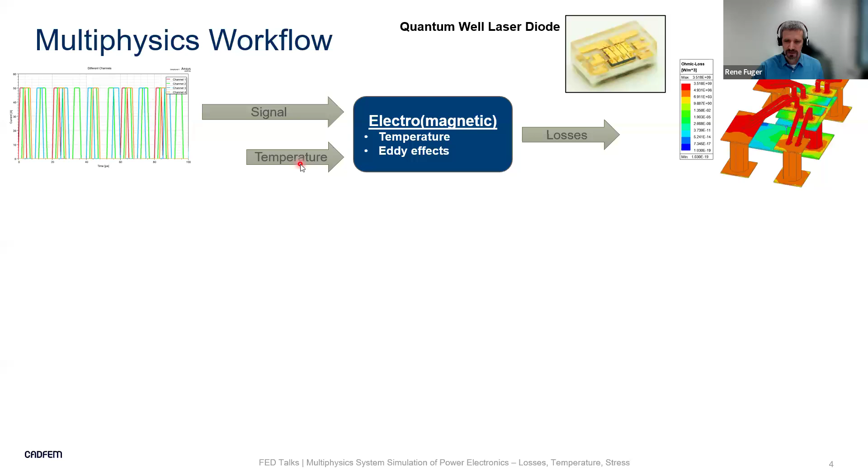You see here something, an arrow which says temperature. For sure, if this system is working at room temperature, there will be different losses than when it works at 100 degrees Celsius, because the conductivity and magnetic properties and so on depend on temperature. So that means we need a multiphysics workflow, especially electromagnetic. That's something which is really close. There's a huge influence of temperature. And so that's why I need also some simulations or some knowledge about the thermal behavior.

The thermal behavior depends mainly on the loss distribution. So we have already seen the losses are not everywhere the same. They are locally distributed. And on the boundaries, meaning is it cooled by airflow? Is it in a fixed box and there's no airflow? Are there some other components around with high temperatures and so on? So that mainly influences the thermal simulation.

So one of my inputs, as I said already, are the losses. But there can be also other thermal loads. For example, I removed the semiconductor part, the laser part, which you see as the green parts in here, because that's not really the electrical part where current flow makes the losses. There are other loss distributions. These thermal loads, these losses in the semiconductor part, in the laser part, can be an input from data sheets or can be simulated in another way, can be measured, whatever.

So I have one part is the losses, one are thermal loads, could be also outside loads, and my thermal boundary conditions. So that can be, again, a function over time. I haven't mentioned this. On this axis, we have seen the time. On this, we have seen the current. Here we see the power over time. So it's a transient behavior. As I said at the beginning, we want to know how it behaves over a certain time, when I apply the currents for a certain range over a time.

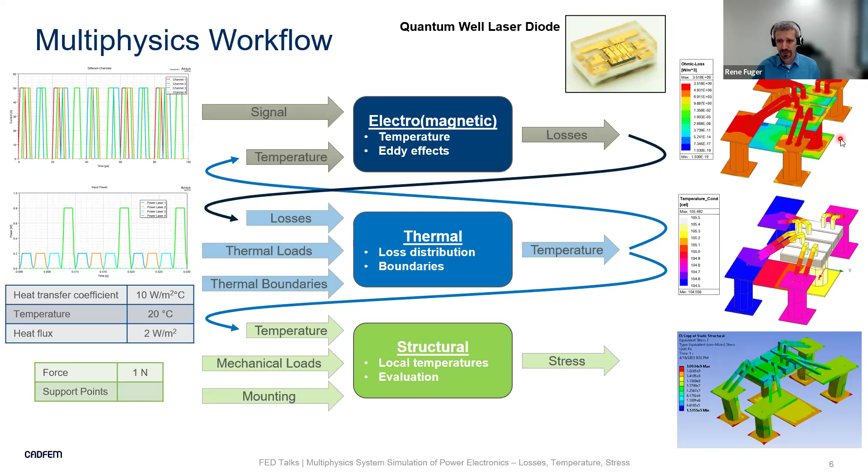Maybe as an information for what we're looking at today: on the left side, I have single values as an input, constant values, or I have a function over time. On the right side, you see I have distributions. The temperature, the losses, the stress, they are localized. They are connected to a position, X, Y, Z position on my system. So those are distributed values. So that's the general workflow of multiphysics simulations.

What is now the challenge? The challenge here is, I want to know how my component, could be this laser diode, could be a half bridge system, could be power electronics, could be a PCB which includes the controller, for example, doesn't matter, I want to know how this works in an operating condition.

I don't want to know what's the worst case. Yeah, that's also sometimes interesting. Or what's the standard, the steady state case. I'm more interested in how this behaves in my system, how this behaves in my working conditions. So that's the challenge which we want to look at today for the multiphysics system simulations. And I've put up here 3 questions. I didn't put the question marks behind, but those are 3 topics which I want to go into today.

First, different timescales. We'll see there are different timescales on how the physics react to changes. Then we have in the electromagnetics the issue that a lot of properties also depend on frequency. Or not only on the frequency, more on how fast the current is changing. If the current changes very fast, I get higher inductions. The induction behavior is different and so on. So I've also looked into this one.

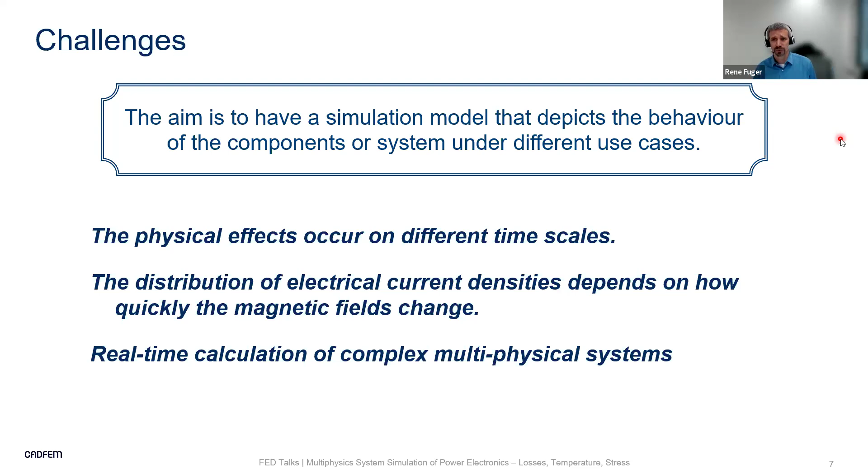Okay, so let's start with timescales. What I mean with timescales: for the electric conductivity or electromagnetic behaviors, we easily have some kilohertz, 10 kilohertz up to megahertz in the system of switching times. It doesn't have to be a sine. It can also be a signal which is switching very fast. We have a very high frequency in the system.

To really capture this in simulations, you have to make very small time steps to capture these changes. Could be a sine, could be a change from 0 to 1, whatever. If I want to capture this correctly, I have to make very small time steps in the simulation because I have to get the point where the change is.

On the other side, in a thermal simulation for the same system, in the range of microseconds, which corresponds to some kilohertz frequency, nothing happens in the temperature. There's a high thermal capacitance, there's thermal conductivity. The whole system is a little bit slower and it depends more on the energy which you have to put in. And if you make it change very fast, the energy which you put in is not this much. That's a different relation.

So to see a warm-up in the system, some relevant change of temperatures, you're more in the range of 100 milliseconds, seconds, maybe minutes, maybe hours, depending on your system.

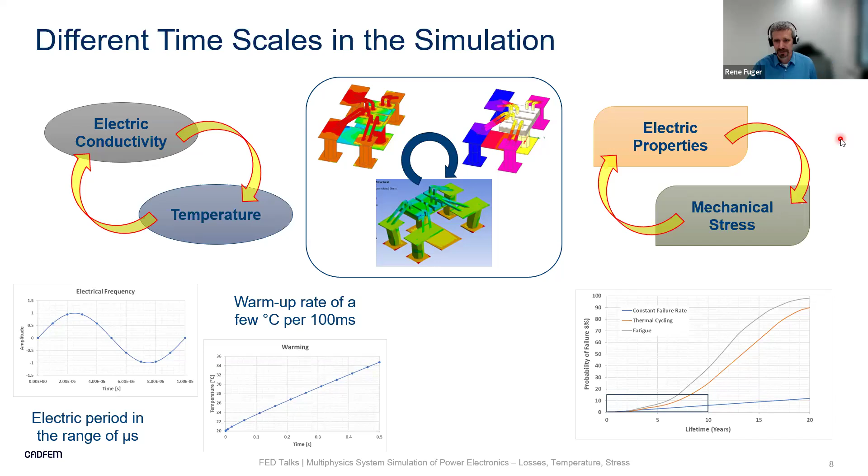And then we are here in years. So on the left side, microseconds. On the right side, we're talking about years. So I can't use a simulation at the same time to see what's happening if I use it for 10 years. So that's one of the challenges.

When we talk about simulation approaches, you might often hear something called field coupling, terminal coupling, system simulations. Field coupling, that's what you see on the left side, is something where we have 3D geometries, where I get these nice colored plots, where I get local distribution of the system, normally very high accuracy, but that takes time to simulate. On the right side, you have terminals, so you have some input, some output, and a function between which connects the input signal to what should come out.

Simulates very fast, microseconds, whatever, but I don't get the localized results. I know only if I put this input, I get the maximum temperature of the system out, for example, the mean temperature, the temperature on one point, which I might be interested in.

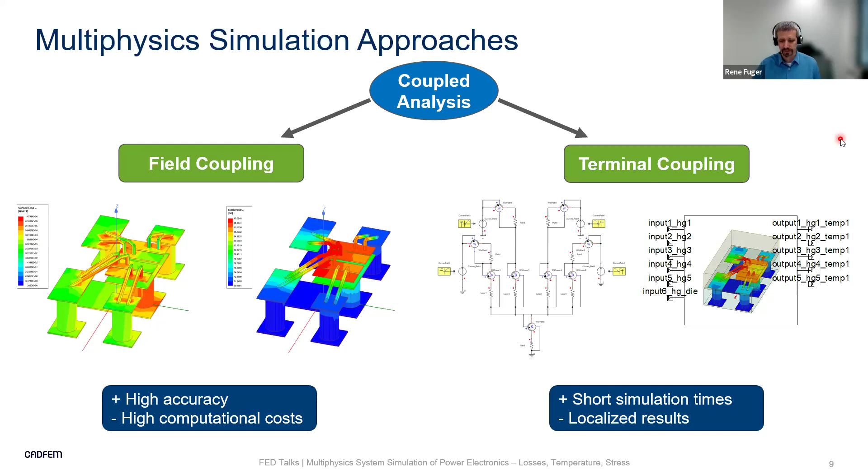Maybe I should explain this a little bit more if you're not familiar with the whole simulation range. So if I talk about field simulation, I'm talking about a system where I discretize my problem. So a typical code, I create a mesh, that could be using finite element methods, can be the FDTD method, the finite-difference time-domain method. There are a lot of different methods there.

I normally have the physics described by partial differential equations. An example for electromagnetics would be the Maxwell equations, which I want to solve. I can't solve these equations analytically on complex geometries. On very simple geometries, on a straight line, whatever, I can do this, but not for complex geometries. So that's why I have to discretize the problem and solve the relevant equations in each of these elements by some approximations and numerical methods.

But you can imagine if you have such a mesh, for each element you have to do this. That needs high computation power. So the good thing is I get high-resolution local fields. I understand the system. I need heavy computation, meaning power and time. And I can use this normally for design validation, where I'm really interested in what's happening there and there, what's happening if I do some changes.

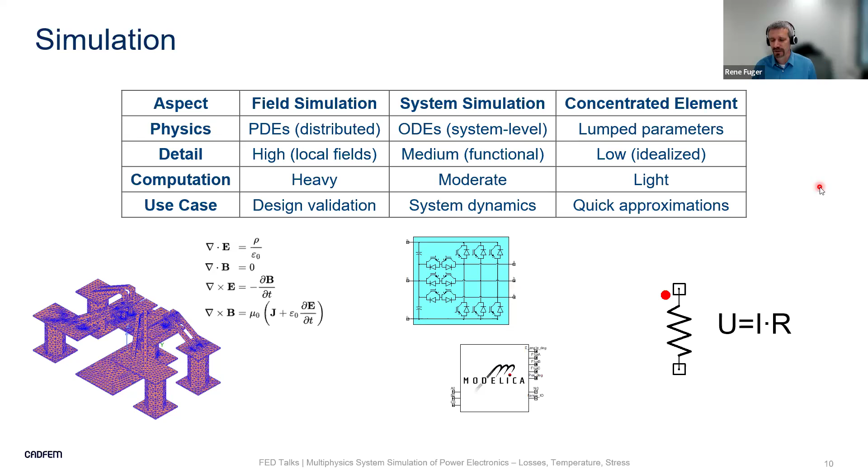Another thing is this one is not connecting to the inductor which is next to it. There's no information on where it is positioned. If you try to make the circuit, you can connect the resistance with an inductor, but they don't know how close they are to each other. If I have two inductors, that's a problem because they can interact over the electric and magnetic fields. If I make only concentrated elements, they don't know where they are.

And now about the coupling. So we want to couple different physics. We want to make coupled analyses. So that means we can do field simulations, which you see here on the left side. The strength is you have the high accuracy. You really have the geometry. You can see what's locally happening.

You can couple the electric degree of freedom with the thermal degree of freedom. So you can go into the detail. You can describe your physics very accurately. And you can get a lot of information, even nonlinear materials and so on. The con is if I do this one, it takes time.

First, I need the time to prepare this one. I have to set up the simulations, then the simulation runs, and then I have to make the post-processing to get my plots and to get the information out of this one. The other point, which is important, I need already a geometry. I have to know the materials. Without this knowledge, I can't do any field simulations.

On the side of system simulations, in regard to multiphysics, it's a simplified problem. I can include interactions between thermal and electromagnetic, for example, or thermal and stress, by connecting the average temperature, the temperature at some point, and I know my system, and then I can calculate the temperatures around it, and so on. It's good for dynamic simulation. It's much faster than the full field simulations.

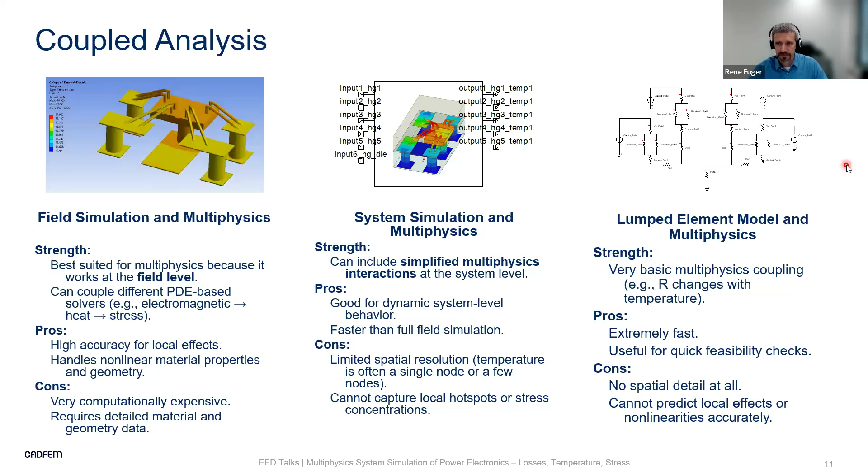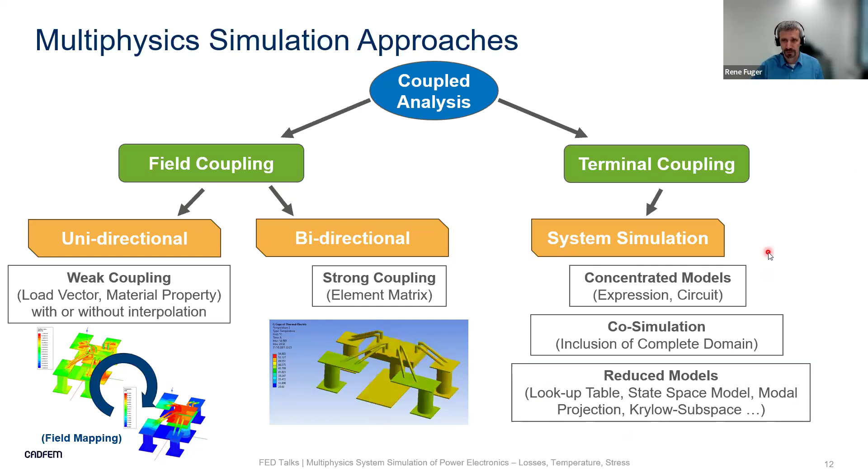So again, coupled analyses: I have field coupling. Unidirectional or bidirectional means I can take the thermal and electromagnetic simulations step by step, or I have to solve them at the same time. That depends on how fast these two react. And I have the system simulations or terminal coupling on the right side. I want now to focus on this here on the right side, system simulations. That's also the topic of this presentation.

So we want to do coupled analyses or multiphysics simulations. We want to use terminal coupling, and we want to use system simulation because we want to describe how a system behaves over a long time or over the operation time.

So the system simulation, I can set it up with concentrated models. As you have seen before, I can use a resistor, I can use an inductor, I can use the same in the thermal part. I can use the thermal conductivity, similar to electrical resistivity, to make a lumped element model of my thermal behavior. I can do the same for a fluid system where I have gas flowing through. So I can describe this by concentrated models.

It's generally based on mathematical models, physical equations. As we have seen before, Ohm's law I can use for this one, for example, and so on. Or also more complex equations: I could use the temperature-dependent conductivity together with the size of the resistor, and then I can get the voltage dependent also on the temperature and the current which I have, for example.

I can use libraries. There are standard libraries. There are a lot of system libraries available, free, open source, but also some which you have to pay for. It is easy to exchange between tools, between companies, between departments, and it calculates very fast, but has in general a lower accuracy because a standard resistor doesn't describe my specific resistor. So that's what I have to think about.

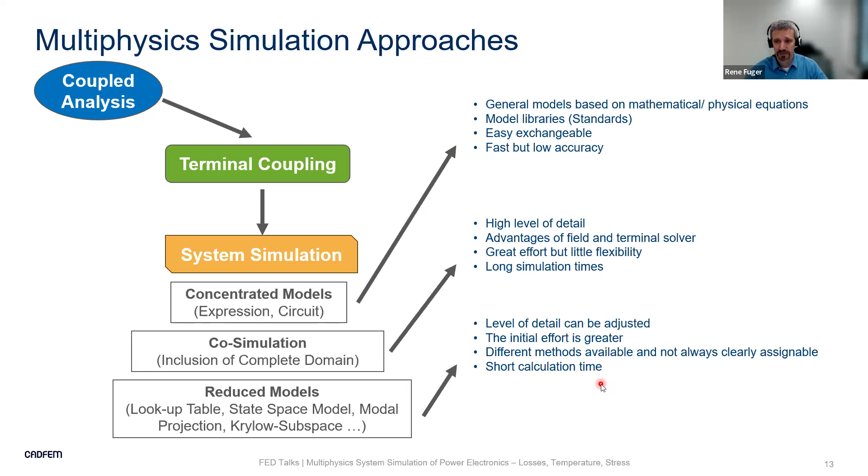So what I mean with reduced order model or surrogate model: as I said, there are a lot of different methods how you can do it. It's mainly based on mathematical methods or on machine learning systems. So you simulate different cases, case A, B, C, D, and you see what you have put in and what's the outcome, and you try to make a connection between these two by mathematical equations, by data tables, by reducing the number of degrees of freedom, like modes which you're using. And then you have this reduced order model.

But if I say, okay, I don't change the geometry anymore, I only want to vary the input parameters. I want to run with higher currents, I want to run it longer, I want to make higher switching times. Then it's useful to have this reduced order model, surrogate model, which costs me some time at the beginning to create. But when it's created, my simulations run faster.

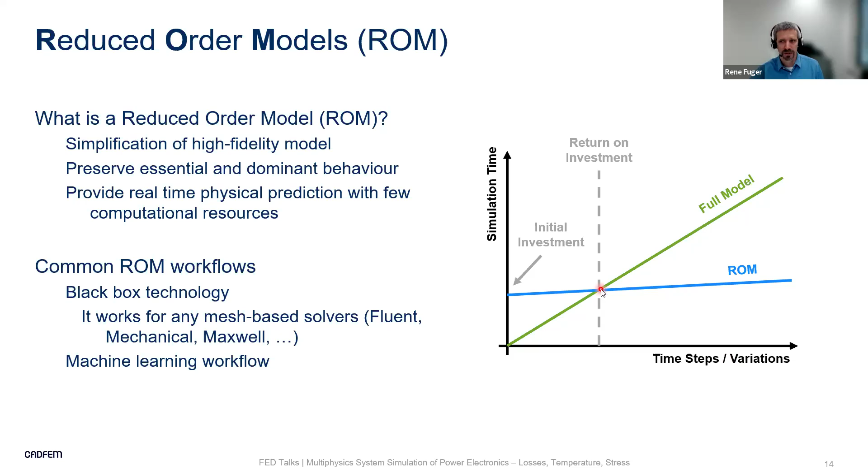That should be shown here on this graph. So if I have a lot of time steps, or I want to run several variations of input parameters, at some point the reduced order model, the system simulation, is faster than running the full model. Yeah? But at the beginning, I have to invest some time.

When we're talking about reduced order models, we have to think about classification. I think that's currently the biggest challenge in creating reduced order models: I first have to know what I'm describing. I can't use all the methods on the same problem. I have to understand the problem. Is my problem a linear problem? Can the material properties be seen as linear? Can the connections be seen as linear? Or is it nonlinear? If the thermal conductivity changes with temperature, it's highly nonlinear. Then I'm here on this part.

If I'm linear, I'm this part. The next question is, can I see my problem as a static problem or as a transient problem? Static means if I put a certain input, power, I have the cooling, and then I get the temperature out. It doesn't depend on what's happening before. But if this behavior depends on before, if it was cooler, was it hotter before, and then I apply the power and so on, then I have a transient problem.

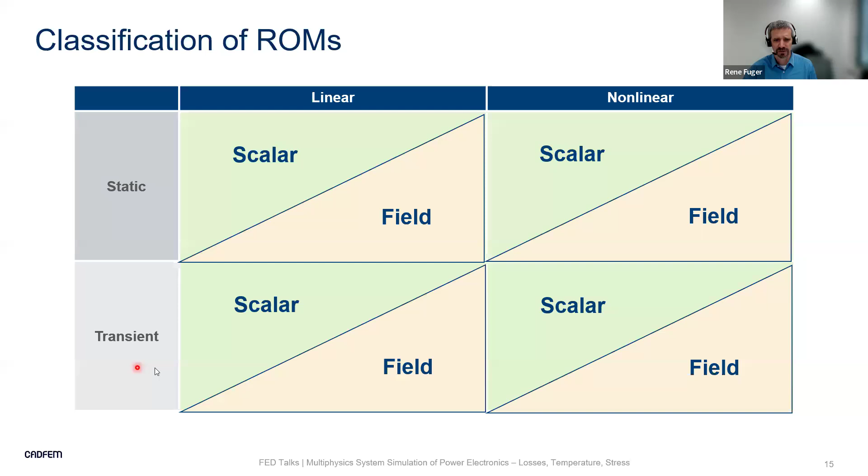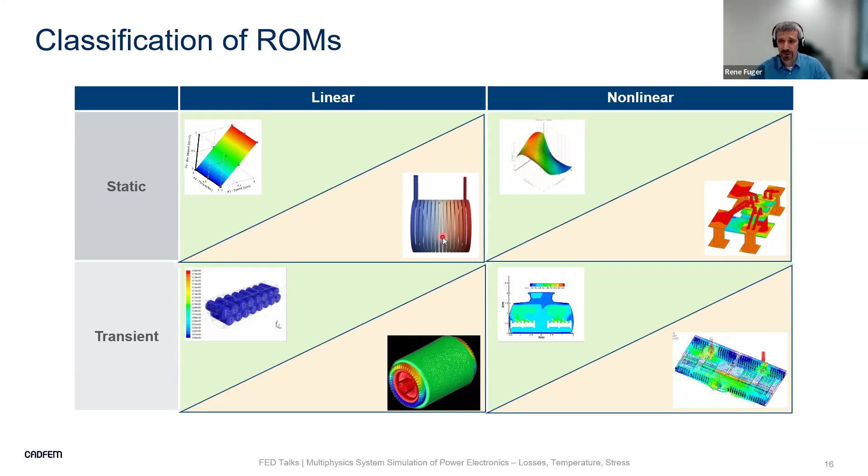And then you get this kind of complex matrix where you have scalar values, field values, linear, nonlinear, static, transient. Scalar values could be a function, could be a table, whatever. Field results are always something which is connected to the geometry, to the location, and you can put it in each of these fields, and then you have different techniques.

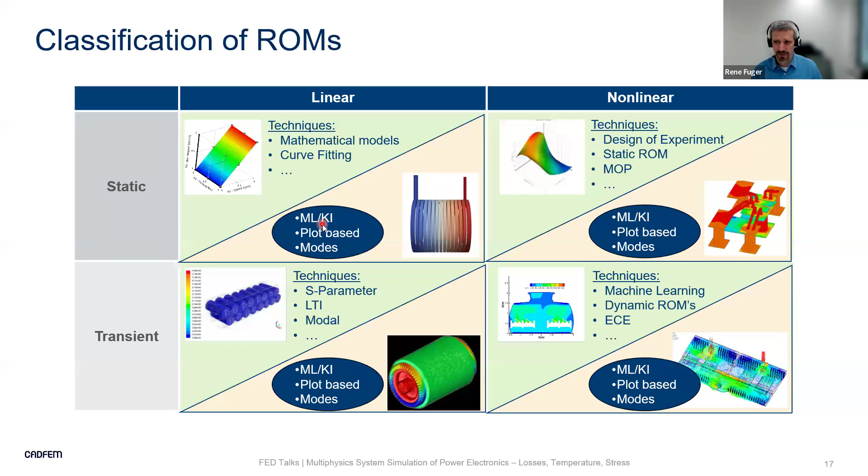So, complex matrix. I want to show you an example with the laser diode, which we have seen already at the beginning on the multiphysics workflow. As I said, that was a project which we did together to see how we can handle this, which reduced order model is suitable for the problem. Maybe there are several reduced order methods which can be applied, and we compared them.

So the challenge was the time resolution, because we didn't want to know what happens at a constant current. We wanted to know what's happening over time for different input parameters. Temperature is changing, current is changing, the environment parameters are changing. So we wanted to do a system simulation. And we want to know, does it have an influence on the lifetime of the system?

Well, the question was, the system is built for 50 amps maximum peak for this time. Can I run it with 60 amps? Is it broken in one day, or is the lifetime only reduced by 10% or something? So that was the idea, and also to create a digital twin model out of this to run these different scenarios.

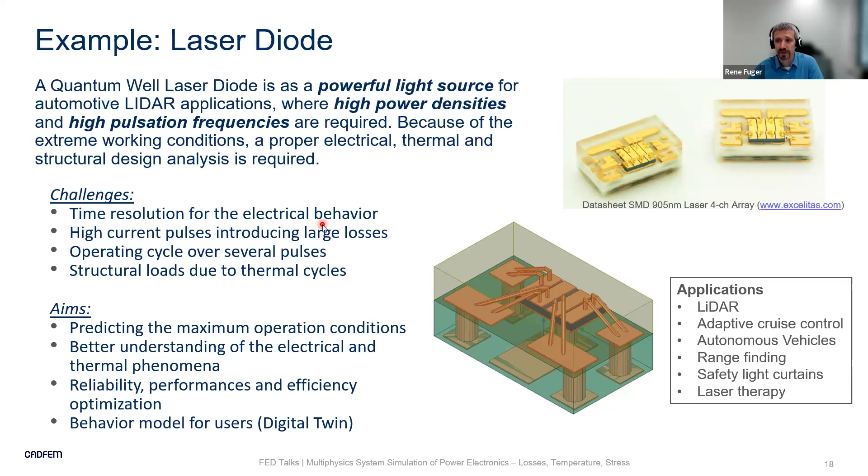So one part is the electromagnetic properties, which we want to extract. You could imagine from the geometry on the left side, you take one of the current paths and you can extract the resistance of the part. You can make it in smaller steps, taking these bond wires as one part, the wire as one part. So you get this equivalent circuit of resistance, and you can simulate this for different frequencies. As we expected, the resistance goes up with higher frequencies because we have the skin effect and so on. So that's frequency dependent.

We can also take the same geometry and analyze the inductance, for example. We always have the self-inductance and mutual inductances, which we can calculate. If we know the inductances, we can also know the coupling coefficient. So how these two bond wires are coupling, or how this bond wire is coupling with these bond wires, which, if there is some current flowing which is switched or sinusoidal, then we also get some current in here because of induction. So we get the inductances, we can extract the capacitance, and then we create a model.

Maybe many of you know PSpice as a model, or HSPICE. Some of you may know Touchstone. Those are models of the electromagnetic behavior of your component. Sometimes you can get it from your part supplier, or from the company which made the parts, as a model which you can put in your circuit simulation.

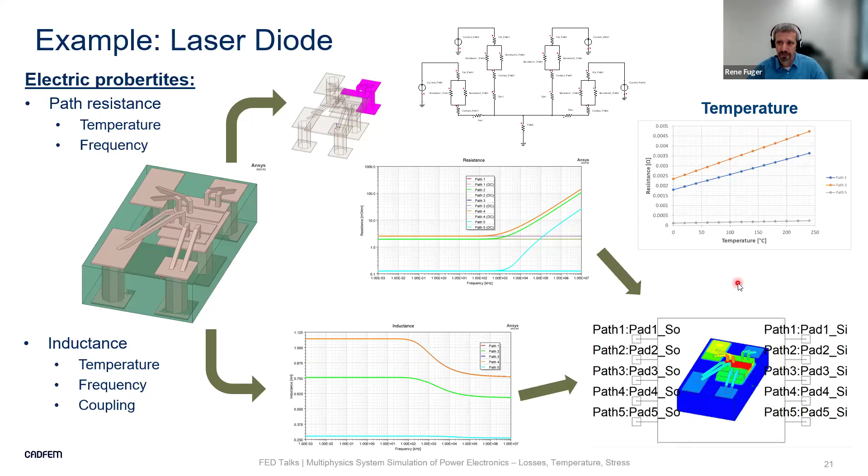Then I made a reduced order model, surrogate model for the temperature behavior. That can be done similar to the electromagnetic simulations. I applied power losses to the different parts and simulate the temperature which is created. And then I can extract this matrix from these several field simulations. I have to do these field simulations for different scenarios. From these scenarios, I can learn and can create a reduced order model.

Maybe you've heard of LTI models, linear time invariant models. There's something which is called MOP, which is a meta model of optimal prognosis. There are design of experiments, tables, and so on. So what I'm doing is field simulations for different input scenarios. They must be chosen in a wise way so that I get the information which I want. But normally software can help you with which method is the most useful. If you have seen the matrix before, there are methods which are explicit for extracting thermal behaviors, and for whether it is linear or non-linear behavior, and so on.

So I can again create such a surrogate reduced order model. So I run all these simulations here. In this case, it was not too many. It was 9 simulations. But if I have more inputs, I get more localized, and maybe have several more simulations. And again, I get out a block. And now I have the information of heat generation input values, and I get out the temperature of the system.

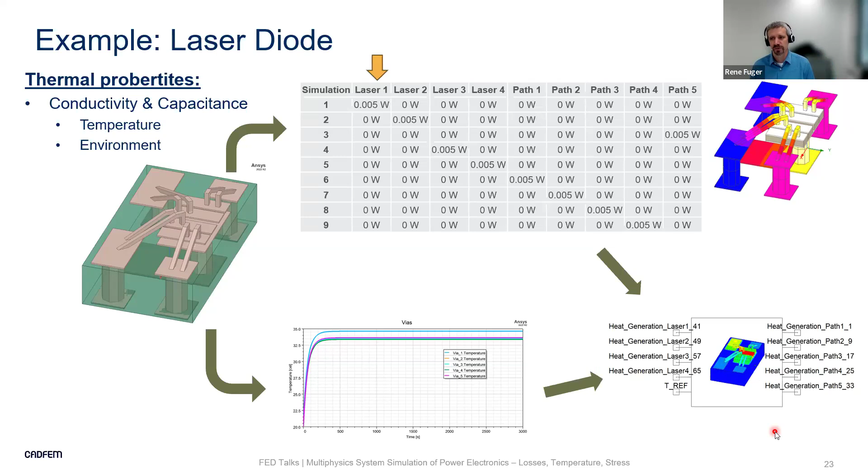How does such a multi-physics system simulation look like? So we take our laser diode system, which we had before. I have here our input parameter, that's the current test scenario, which you see here. That's in my circuit, the current sources here. The current goes into the electromagnetic part. And from the electromagnetic part, I can measure the losses. And I use these losses on the conducting path as an input on my thermal model.

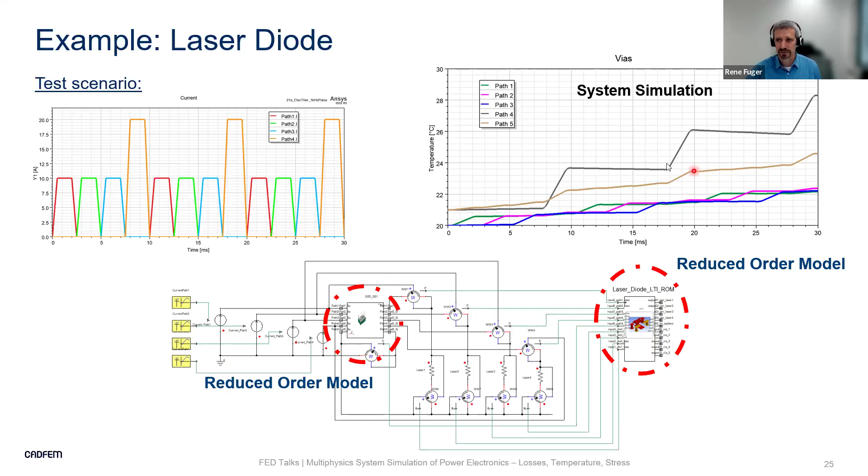I have additional losses in the lasers. As I said at the beginning, I don't want to model the laser, the semiconductor part, specifically. There I took the data table. If I put this current on this laser part, I get these losses. Also, I measure the losses here. It's not really necessary to put all this measurement equipment in here. There are also other ways to make it nicer to view, but it should show that there are a lot of measurement instruments. And finally, I have these 2 reduced order models on the left and right side connected with my circuit, and I run the simulations. And that's the output of the temperature.

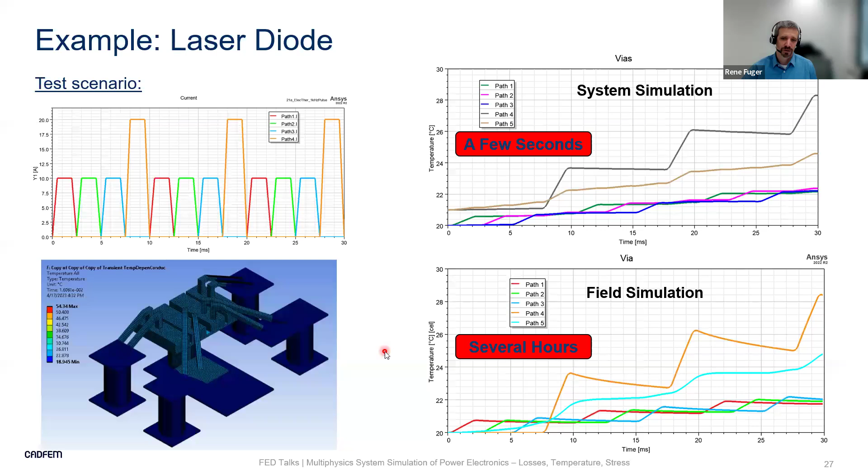And then I compared this one with a full field simulation, and we can see that we have in general the same behavior. It's not exactly the same. That's not to be expected, because the reduced order models have less information, less details, but the general behavior is quite similar. And also if I look at the temperatures, here a little bit more than 28, here a little bit more than 28, that fits quite well. What's the difference? The system simulation runs in less than a second. I've written here a few seconds, depending on the complexity, but this simple model was running in less than a second. The field simulation took several hours because there's a very fine mesh. I have a lot of degrees of freedom, so I need a lot of time.

I want to make now a short introduction or a short turn to the current distribution, which is in power electronics also very important. I think everyone of you knows if I go up with the frequency, the current path can change significantly. In this example, I have here a track. I have a PCB substrate and a ground layer below.

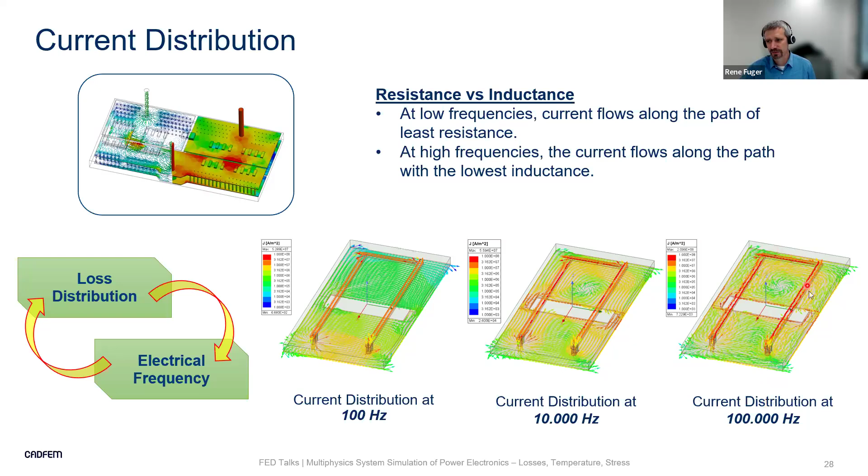And if I'm going up to higher frequency, then I can see even the effect that the current is flowing only on the surfaces. The distribution changes a little bit. And this has the influence that where the losses appear also changes. And if I do multiphysics electric thermal simulations, I have to know where the loss is happening. At 100 hertz, there's more losses here. At 100 kilohertz, the losses are very high here around this cutout. So I have to get this information.

So we looked into a power electronic system. That's a half-bridge system, but could be also a busbar system, battery connector, inverters. Everywhere where you have power electronics, you can look into this. So the losses of the device are not distributed evenly. So I have hotspots, which can influence the lifetime, the efficiency, and so on. And I have to analyze these phenomena. I have to see under which operating conditions where the losses are. And that's where I'm using a thermoelectric system description of the problem.

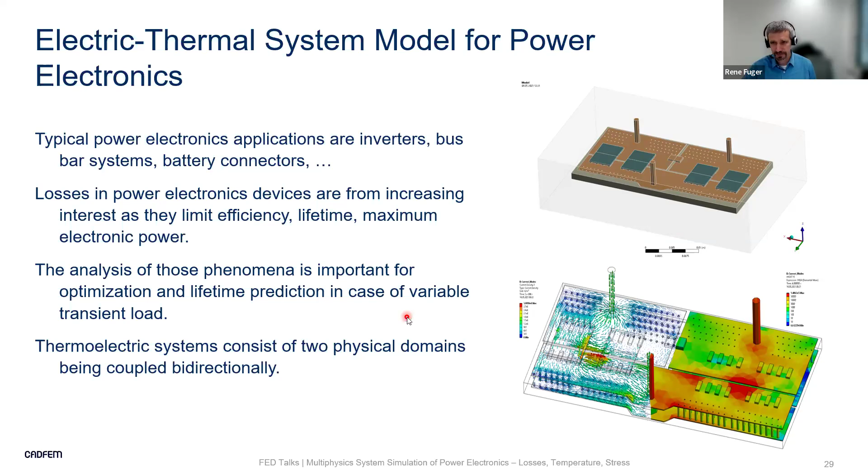So here again, a geometry, as I said, a half-bridge system, inverter system. We have the capacitance, we have the semiconductor parts, the MOSFETs in our systems. And the problem is we want to know the temperature distribution and the current distribution, because the temperature distribution can also influence how much current is flowing through each of these semiconductors. This could change. If I do a fully coupled electric thermal simulation, this is very time consuming.

You see here some time steps. I made a transient simulation that ran on a larger computer, not huge, but larger, for several days. But afterwards, I got this nice picture. I could see for each time step where the current distribution is. I can see which vias have very high currents and how I can optimize it.

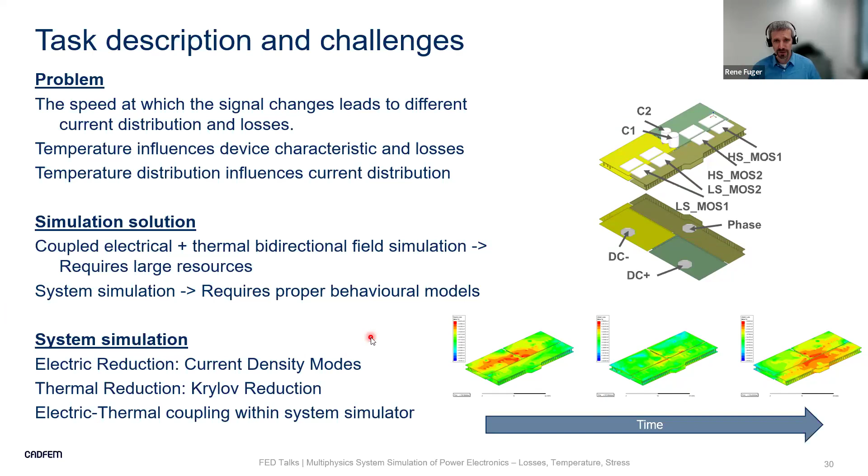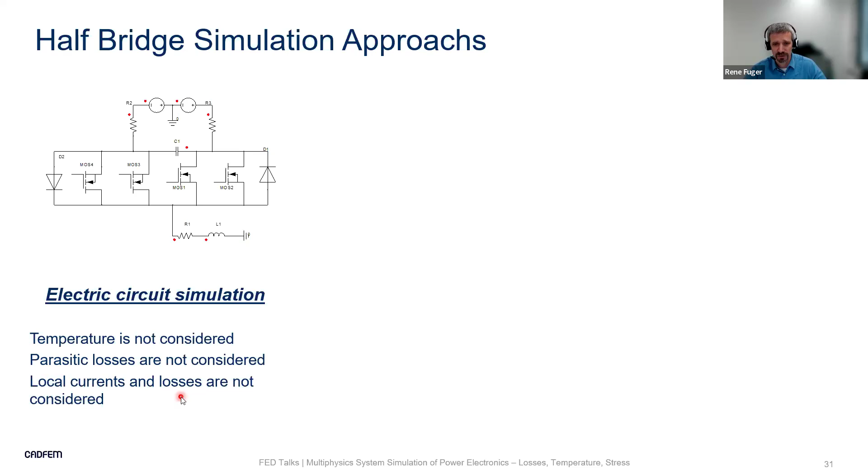If I make a reduced order model of my conducting structure, bus bars, PCB, whatever, I get the parasitic losses. And I can extract them and put them into my circuit. So in this case, I also know, okay, there are losses in the conducting paths which connect the components. Here are only the components, here the conducting parts plus the components.

And then I can model the parts, the semiconductors. There are models which also include some temperature information and how much losses they create. So I get now also the temperature behavior into the model. And I could even take the thermal conductivity, as we have seen before, into this system simulation. But what's still missing in this part is that the local currents and losses are not considered.

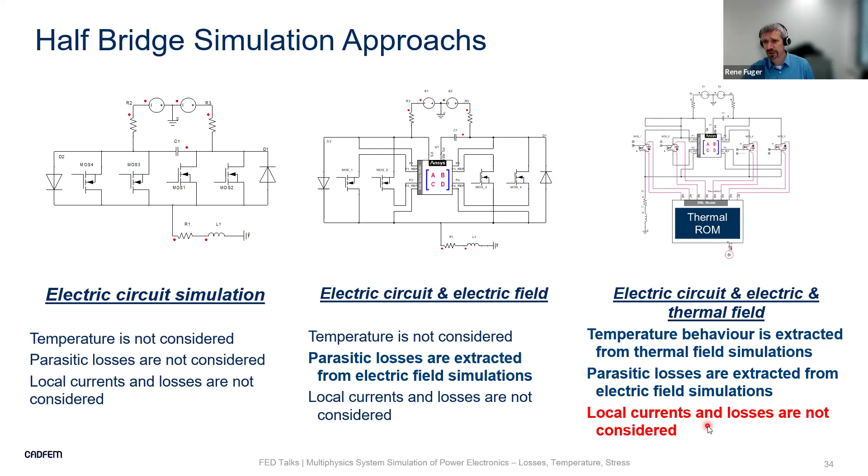And that's something we looked at in another project, how we can also include information on the local distribution. And what we have done is, instead of using a single input and a single output, we describe the current distribution, for which we first did field simulations with different input parameters. Out of the field simulations, we then get something like modes. So we can describe the current distribution by 10 or 20 modes which are important. These modes can be stacked together, for example.

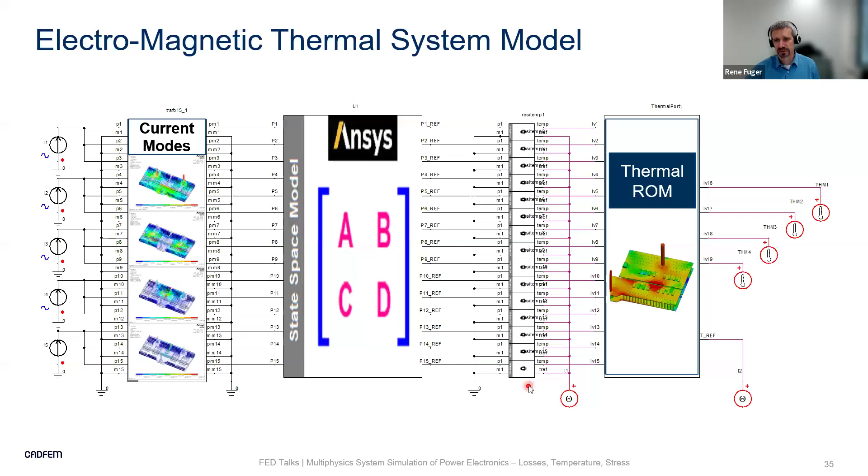We can create out of a single or of a small number of modes the complex current distribution. We have seen already the matrix before, which we have for the state space model, for the resistance, inductances, and so on. We can put in the temperature dependency of the tracks, and we have the thermal model.

And with such a setup, as I said, we have different modes. The modes consist of the different input parameters. They describe the current distribution. We have the temperature dependency. We have the thermal ROM. We could recreate the field simulations with system simulations, again, by reducing the simulation time by a significant number, 100 times faster, 500 times faster, depending on the problem and how detailed you looked into it.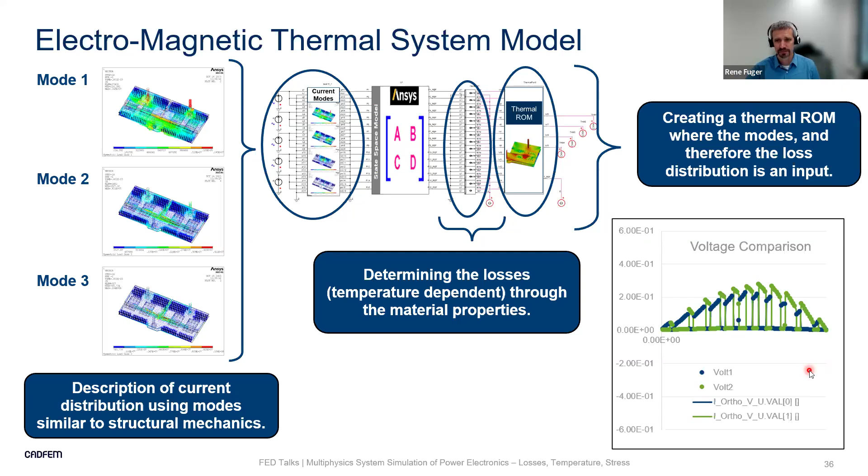Finally, what's a digital twin? So now with these reduced order models, which simulate very fast, which can calculate the results very fast, we have the basic elements for doing digital twins. So that could be the signal input, which can be known before or can be measured. I have my electromagnetic model, I get the losses, I have my thermal model and my mechanical model. I haven't mentioned the thermal model before, but it's again like the mechanical model. It's again like the electromagnetic thermal model.

You can create a reduced order model which gives you information on what's the maximum stress, where's the maximum stress, and so on. So I have the models, simulating fast, less than seconds for each time step. It's microseconds, so nearly in real time, I would say, or in real time, depending on the problem. You can measure your input parameters, thermal loads. You can measure mechanical loads. Is it shaking? Is it not shaking? Has it fallen down? You know your environment. Is it hot? Where is it built in? So you have this simulation path.

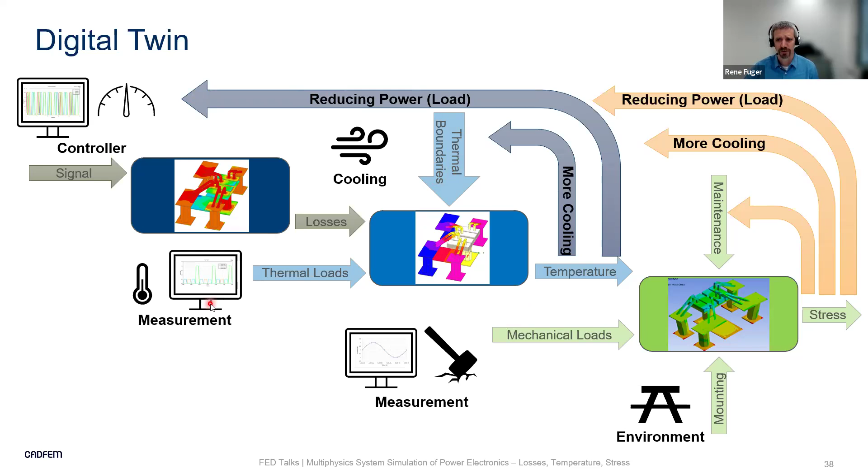And now you can use the output from the simulation, the temperature, to manipulate your thermal input parameters. Maybe you want to have more cooling, or you decide to reduce the power, because you don't have enough cooling at the moment, because the thermal load is too high, or the boundary conditions are not good. Or for the mechanical stress, you see there's a lot of mechanical stress, warm, cold, or there's a lot of mechanical loads. You want to increase the lifetime, so you reduce the power again, so that the warm, cold stress is not too much.

You increase the cooling, or you decide, okay, we have to do maintenance a little bit earlier than planned because this part was really heavily used. So that's part of the digital twin. And the idea is, from the reduced order model, from the system simulations where I started, you have already these parts. Now you only have to include them in a system which can then also interact with the controller, with the measurement system.

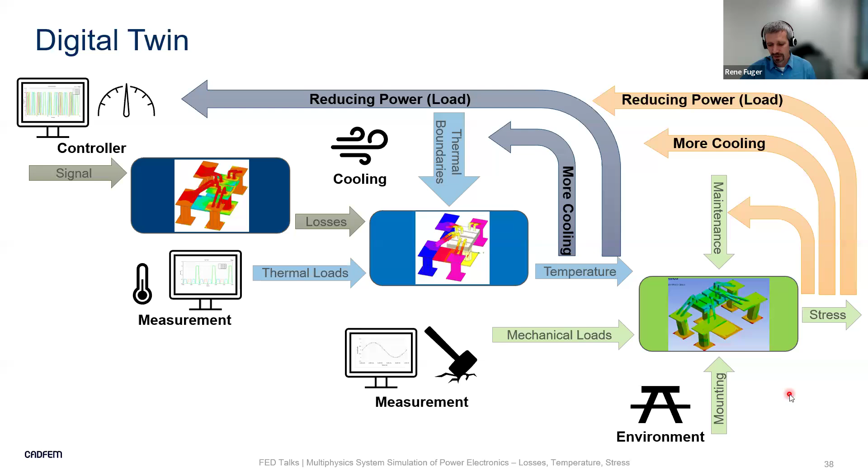Yes, and from here, I'm coming to my summary and outlook. I wanted to explain why I'm using system simulations for electric, thermal, mechanical simulations. So what's the advantage of system simulations compared to field simulations? And what you get more with system simulations than when you use standard lumped elements or concentrated elements. I wanted to show that for model order reduction there are a lot of tools available, a lot of methods available, but depending on your physics, on what you want to describe, is it linear, static, nonlinear, transient, you have to choose the right tool.

The reduced order model accuracy depends on which method you use and how much effort you put in, for sure. They can be very accurate. It doesn't mean that reduced order models are not as accurate as field simulations. Field simulations have more information.

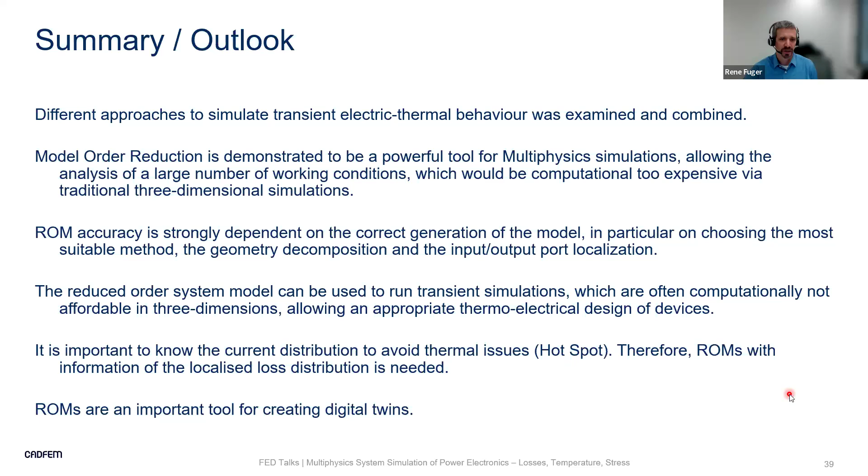We can use the reduced order system simulation for transient simulation over a long time. And it's important to know where you have your local heat. So that's why system simulations combined with field results could be very important, so that you can optimize the cooling system and so on. And ROMs, reduced order models, are an important tool for creating digital twins. That was the last two slides which I've shown. It's the basics, in my opinion, for creating digital twins.